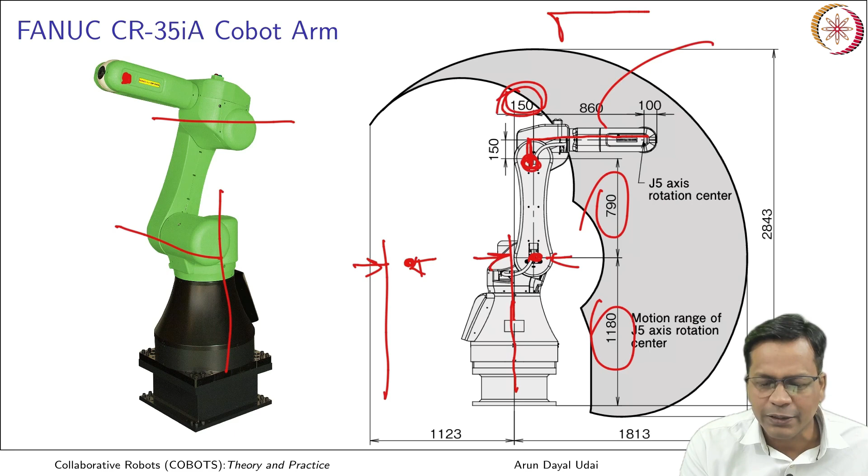It is the 3R stick model of the Fanuc arm, up till the wrist. The DH parameters based on the dimensions which are here: 1180, 790, 150, and finally the length up till here, that is from here to here.

So that makes it like this: 150, 790 and 860. So this is a regular 3R spatial arm.

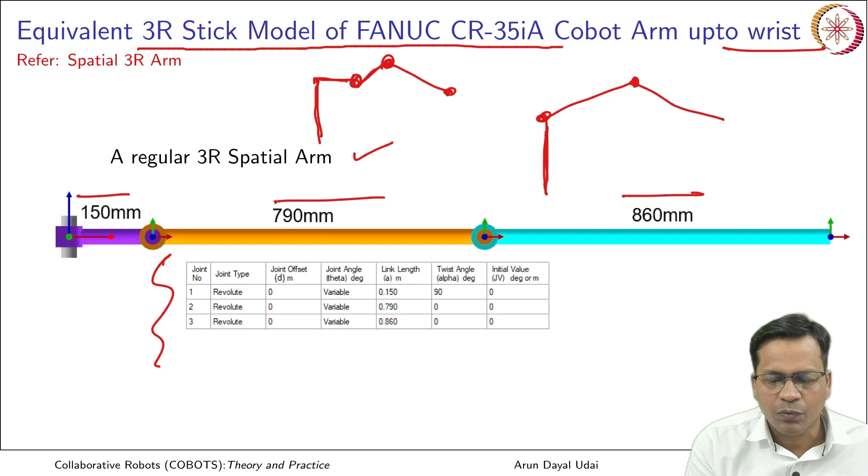In the earlier case you saw the first link was like this, the second was like this, and the third one was like this. But in this case the first link is shaped like this, the second one comes like this, and the third one goes like this. The first joint, the second joint, and the third joint are like this.

So there is a gap in between the first axis and the second axis. It was not the case for the standard 3R spatial arm. So I have to consider this distance also now, because this is a subset of the first three axes of the Fanuc CR-35iA arm. This is how I have split it into a 3R stick model.

Now I have to do inverse kinematics of this. Not just this link, now you can see this link, if I put it in this orientation, this link is something like this. Now I have to consider this 150 length also.

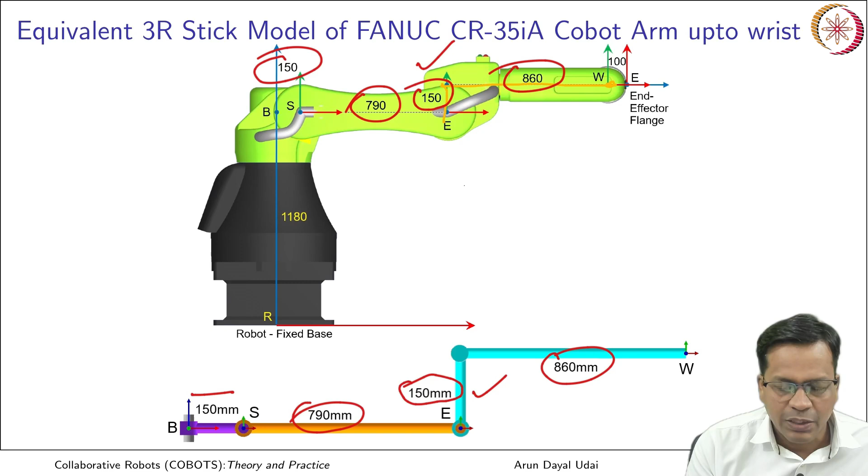So that has to come here. Now the modified stick diagram would be 150, that accounts for this distance, 790 for this distance, 150 again for this distance, and 860 for this distance. So overall my 3R stick model for this robot is like this.

This is very much near to the standard 3R spatial arm. So this point can go to any position in x, y, z location, and you have to solve for the axis angles: the first axis theta 1, the second axis theta 2, and the third axis theta 3, given x, y, z.

Okay, so this is the problem which I need to do inverse kinematics for.

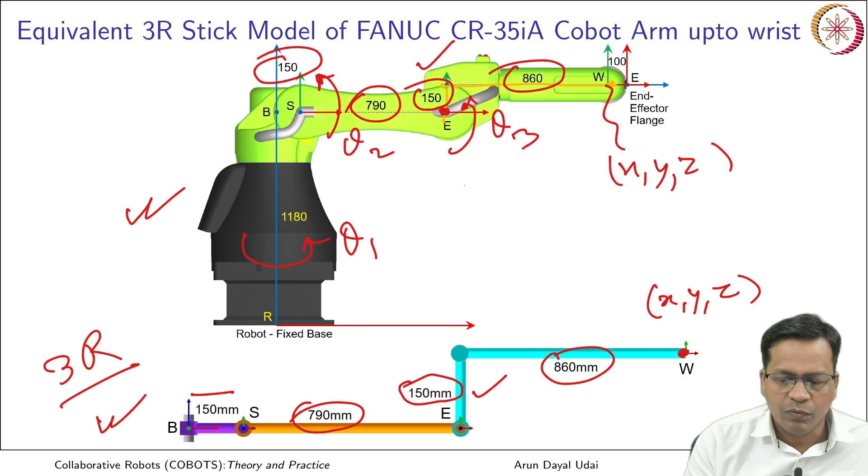Now let us convert this link, the third link, which is a bent link, to an equivalent 3R spatial arm kind of structure, so it becomes easier addressing the inverse kinematics problem. So instead of taking it like this, that is an elbow kind of structure, I will consider an equivalent link that starts from here and goes till here. This is a link replacement, so instead of using this, I will use this one.

So what is my equivalent link length then? It will be 150 square plus 860 square, and root of that. So that comes out to be 872.983 mm. So this is my new link that I have put.

Now when link 3 makes an angle of 0 degrees, that is theta 3 is 0 degree, in that case this at home position would be 9.894 degrees. This can be easily calculated using tan inverse of 150 by 860. So that angle is 9.894 degrees, which it has in its home position also. So this is the start angle of this link, and you have link length of 872.983 mm.

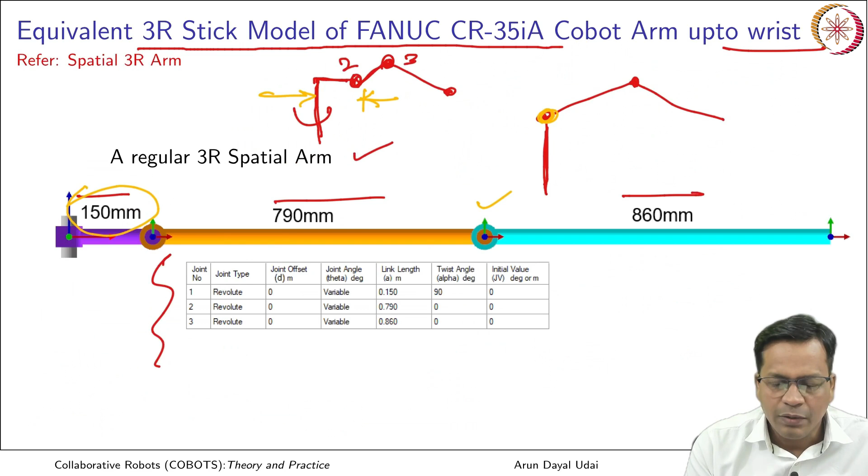Now I can do standard inverse kinematics of this arm in a way very much similar to this. So instead of 860, it is now 872. So this is my home position angle.

When Fanuc shows it as 0 degree, that angle would actually be tilted something like this, but the real Fanuc will show me this angle. So when it is horizontal to ground, it already makes some angle from the ground. So that I call it theta 3 alpha.

So that is the additional angle that accounts for the joint angle theta 3 plus this permanent angle, that is alpha, that is 9.894 degree. Now I will start solving for this.

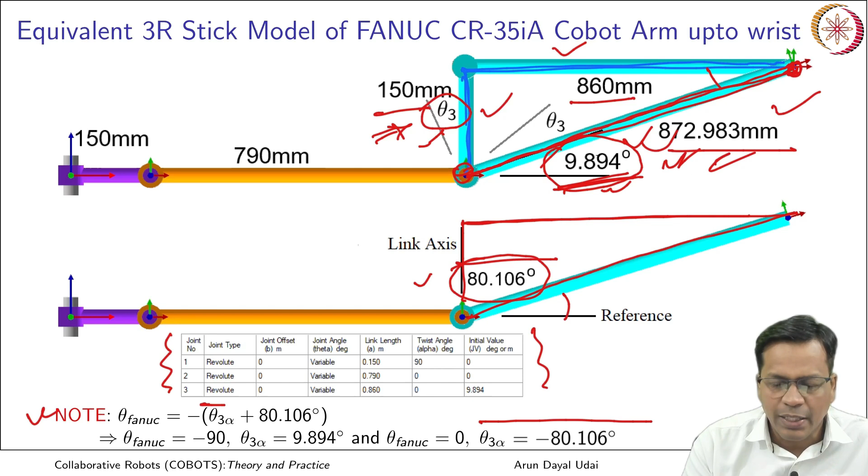For any given position x, y, z, this robot will configure like this. So here comes your theta 1, this is your theta 2, and you have theta 3. Actually theta 3 would include - this is your new link length, that is the equivalent link that you have put, and that makes a permanent angle apart from theta 3. It will have an angle alpha also, that makes it theta 3 alpha over here. So that is how I have put it, so as to make it very simple.

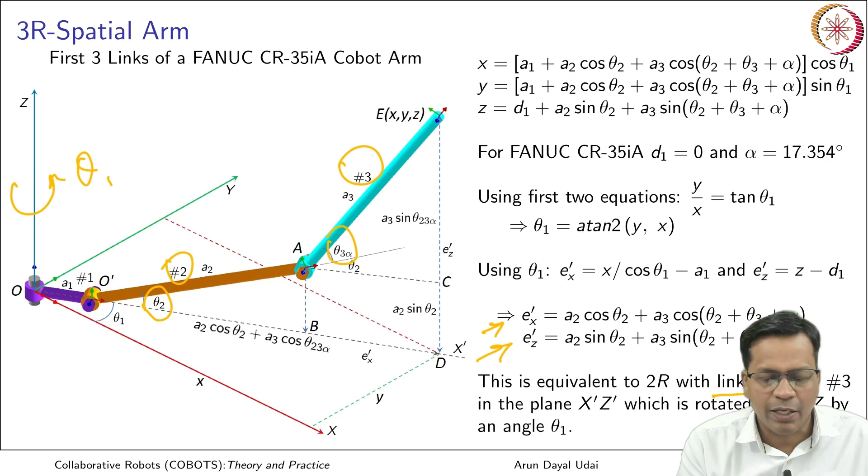This is equivalent to a 2R arm with links 2 and 3, in the plane x dash z dash, rotated about actual z by angle theta 1. Using this, if I know E x dash and E z dash, I can quickly obtain angle theta 2 and theta 3 alpha using our 2R solution.

That is your solution, but this theta 3 is not exactly theta 3. Theta 3 alpha can be used to get theta 3 like this: theta 3 is actually theta 3 alpha minus the alpha angle. So this theta 3 alpha included theta 3 and the alpha angle, so that alpha needs to be deducted to get the actual theta 3 shown by the robot controller. That is what can be obtained.

So the number of solutions here would be 4. This link is like this, got it? This is how it should look like. This is your first link, and you have elbow up and elbow down solutions. Again it will come as elbow up and elbow down. The one shown here is the elbow down solution. You can have an elbow up solution also.

The first angle theta 1, that is A tan 2 y comma x, gives you theta 1 and pi plus theta 1. So it should be all in the front or at the back and come back to touch the same point x, y and z. So this is how it is. The first angle would be 180 degrees behind, so if this is theta 1, the next one would be theta 1 plus pi. The arm will go back, and from back it will again come back to the same point.

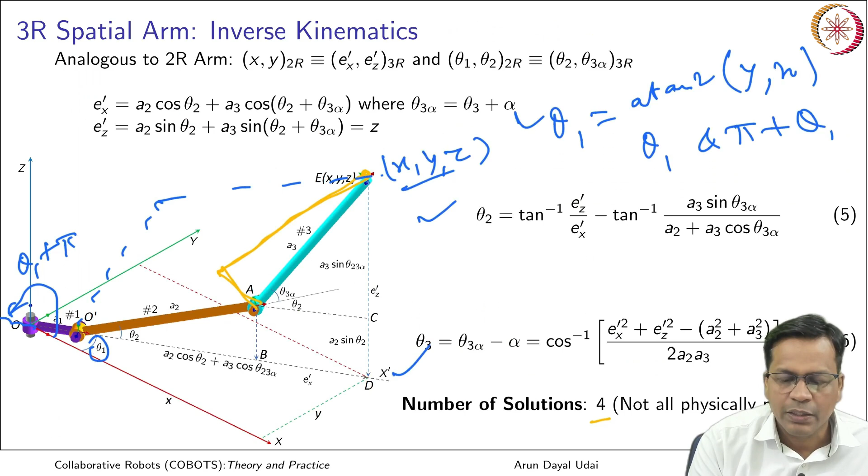It is not always possible for a robot to take up this mathematical solution; it may not be physically possible. So if I use the same solution obtained here for theta 1, 2 and 3, I can use my standard coding. I have used MATLAB here to do this. It will look like this.

You can see the stick diagram of the complete robot here that includes all the distances. This is your D1. From here to here is A1, this is A2, and I formed the equivalent link that looks like this. This is your alpha, and you may have some angle also. In this case theta 3 is equal to 0, so that angle comes here. This rotates like this, this rotates like this, and this rotates like this. This is theta 3, theta 2 and theta 1.

So if I put a sample value for the state of the robot as shown in this figure, this is the coordinate which I should be putting for the Fanuc robot, and this gives me theta 1 is equal to 0, theta 2 is equal to 90 degrees, theta 3 is equal to 0 degrees. You have to take care of solutions where the denominator is 0, which you can exclude. You can have an atan2 implementation here, as I have done over here.

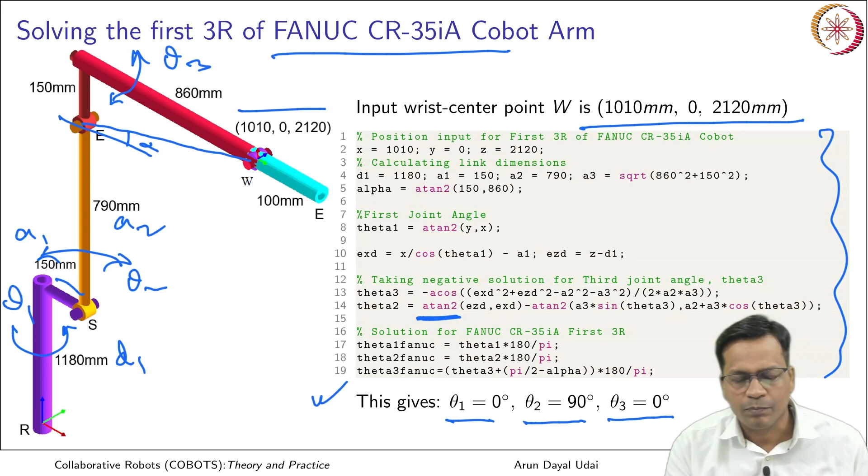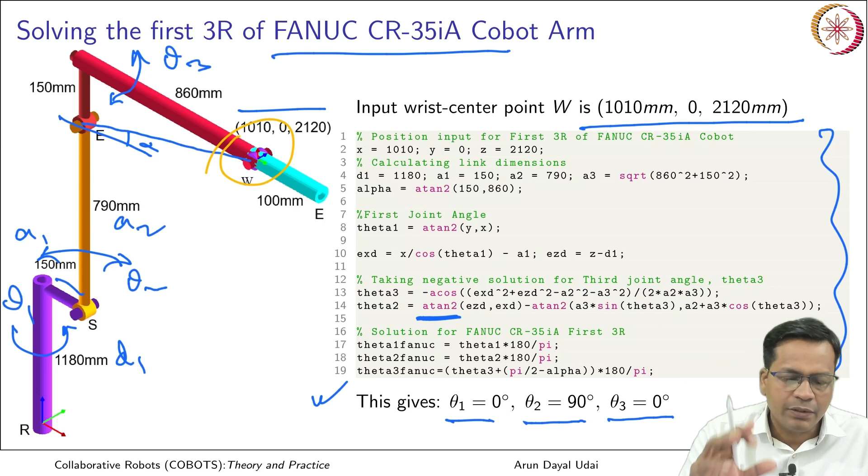This is how inverse kinematics right up till the wrist is solved, using the first 3 links of the robot, which helps position the robot to a particular pose. Then you need a further 3 degrees of freedom to orient it. So now, inverse kinematics using kinematic decoupling: up till here it is a 3 degree of freedom, 3R spatial arm.

This is the Nachi robot CZ10 cobot. Till here it is 3R. The architecture of this robot is also similar to the one used by Fanuc, only the dimensions are different. So till here it is this. After that it is another 3 degrees of freedom, so that goes like this.

If you take this up from here, this is your axis that comes like yaw. And then you have the pitch axis that is here. And then you have one more axis like this, so that finally comes out like this: this is roll, this is pitch, this is yaw.

So you have all 3 axes intersecting over here, and that is known as a spherical wrist. It behaves like a spherical joint which can attain all 3 rotary motions.

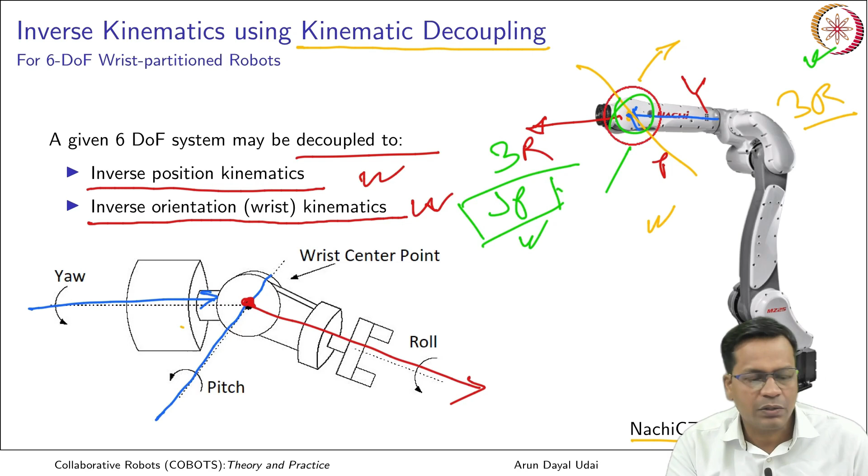A given 6 degrees of freedom robot can be decoupled using inverse position kinematics and inverse orientation kinematics. There are 2 problems: if you know the wrist center point, you can do inverse position analysis the way we did in the last example, and for the remaining 3, if you know the orientation, you can solve for them. For orientation we use this approach, for positioning we use this one. This is known as wrist partitioning based approach to solve inverse kinematics.

So now let us continue. This is another robot, Staubli TX2 Touch 90 robot. This also has a similar configuration with the wrist center point somewhere over here.

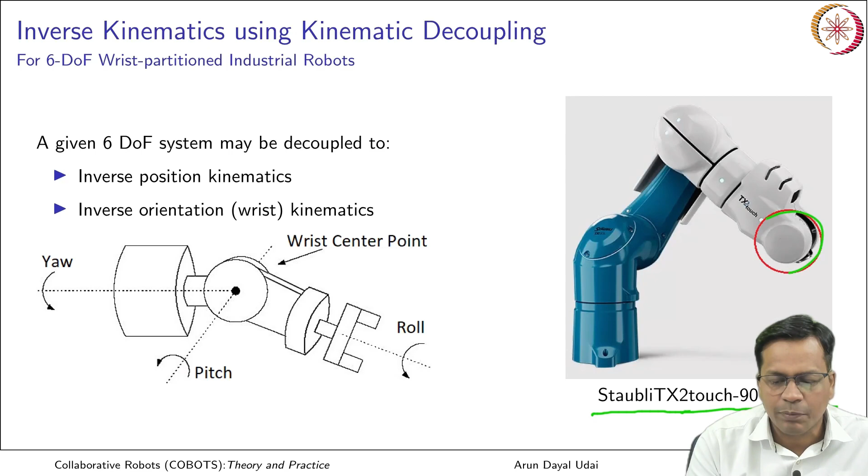Now, steps to do inverse kinematics for wrist partitioning based approach using trigonometric and vector approach only. So what is my input? Input is the end effector position that is given by, if this is the 6 degrees of freedom robot, this is joint 1, joint 2, joint 3, 4, 5 and 6. Finally you reach till here.

So this position is known, the position of end effector that lies here is known. So this position vector is known, which I have written as O6 with respect to the base frame, that is O, that is 0.

So end effector position is known, and for orientation, if you know the roll pitch yaw angle of the end effector, that is RPY known, you can quickly convert it to the rotation matrix. If you remember your Euler angle conversion, roll pitch yaw angle can be converted to rotation matrix using this.

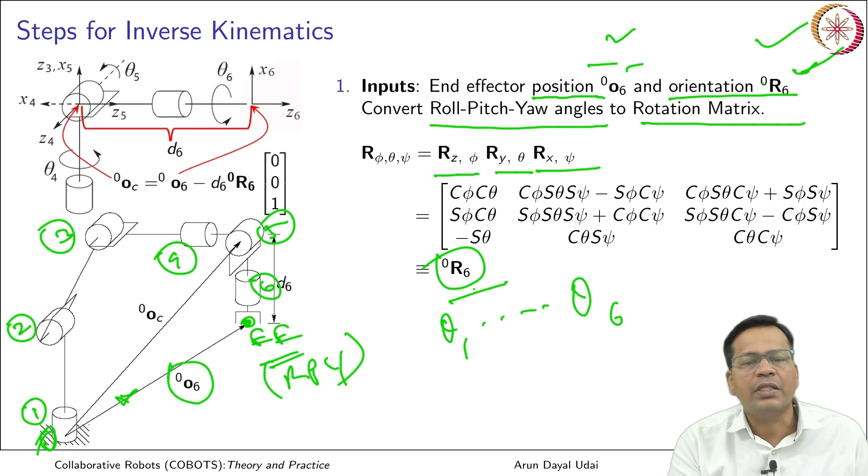So, rotation about x, y and z. If you know roll pitch yaw, that can be used to convert it to the rotation matrix of the end effector, and this is with respect to the 0 frame again. So these two things are known, the 0R6 is known, 0O6 is known, position and orientation. So what I need to find out is all the joint angles theta 1 to theta 6, because this is a 6 degrees of freedom robot.

So the next step is, using the known values, solve for the first three joint variables theta 1, theta 2 and theta 3 such that the wrist center 0OC has the coordinate which is given by this.

So the last length is known. This offset can be extracted, d6, from the technical specification. If you created the DH parameter table, this is coming under d6, that is joint offset, distance travelled along the z axis. So it was this 6, this is your z5, is it not? So this is your 5, 5, 6 and 4 all are intersecting at a point.

So use the inverse kinematics solution for a 3R spatial arm. Now, if I know the location of this point, the wrist center point, the remaining arm is a 3R spatial arm and I can quickly find out.

So 0OC is known using this. If this position is known, this is known using this, d6 is known, but d6 is known, this vector is known in its own frame, that is about this frame. So it can be written as d6, 0 0 1, or 0 0 d6, because this is the distance along z. That is with respect to this wrist.

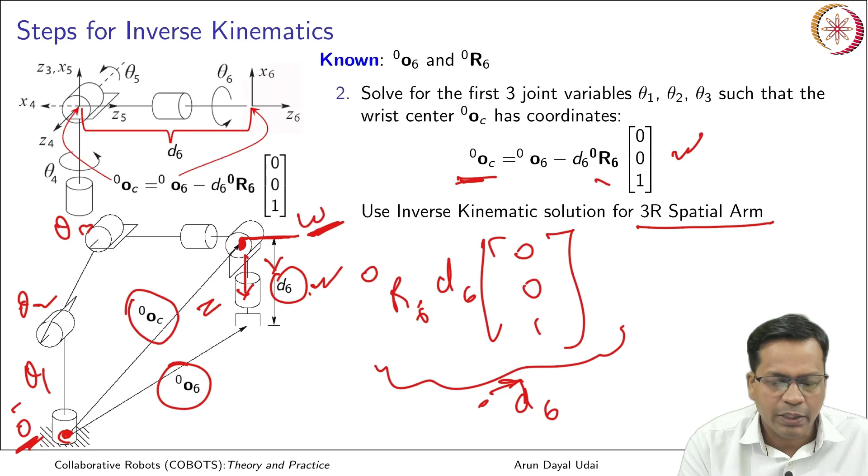Using the joint angles obtained in step 2, I will compute 0R3. Now that I know theta 1, theta 2 and theta 3, I have the DH parameters already - D1, A2 and A3. So I know the dimensions, I can quickly compute 0R3, the rotation part of transformation matrix 0 to 3.

So you have 0R3 coming here as a 3 cross 3 matrix, and then you have position of wrist center point over here. So this is where you can obtain 0R3 - you just do forward kinematics right till the wrist center point and you can quickly obtain this.

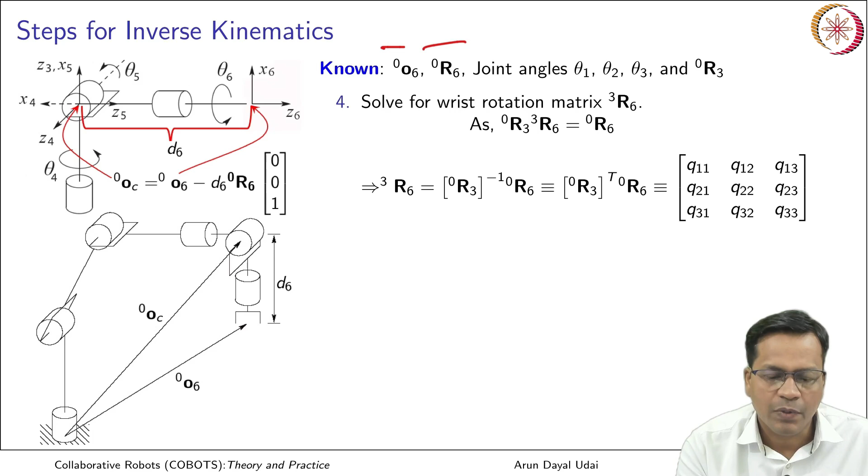Now I will use it. So now I have the following things in hand: these two are from the given problem, the joint angles theta 1 to 3 obtained earlier, and 0R3 from the previous step. So you already know 0R6 is the product of 0R3 and 3R6, that is rotation transformation from here to here and from here to here.

So now I can use this again, I will take the inverse. I can bring it to this side and calculate 3R6, from frame 3 to frame 6. I can quickly obtain it like this by taking the inverse. This gives me a set of values as a 3 cross 3 matrix from 3 to 6 frame. I got the values here directly.

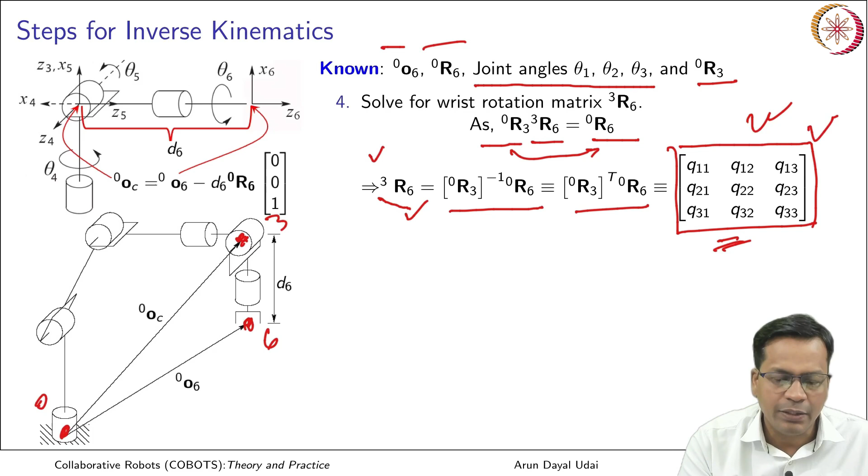Now what I will do is use this again in the next step. So now you have in hand 0O6 and 0R6, joint angles theta 1, theta 2 and theta 3. If you have theta 4, theta 5 and theta 6 already, those are in terms of variables.

So using the Euler angle system again, Z, V and W. Z is along this, this is called V and this is called W. I have used all three rotations now, theta 4, theta 5 and theta 6. If you use this, I can quickly get 3R6 as this matrix, directly from the Euler angle approach covered earlier in one of the lectures.

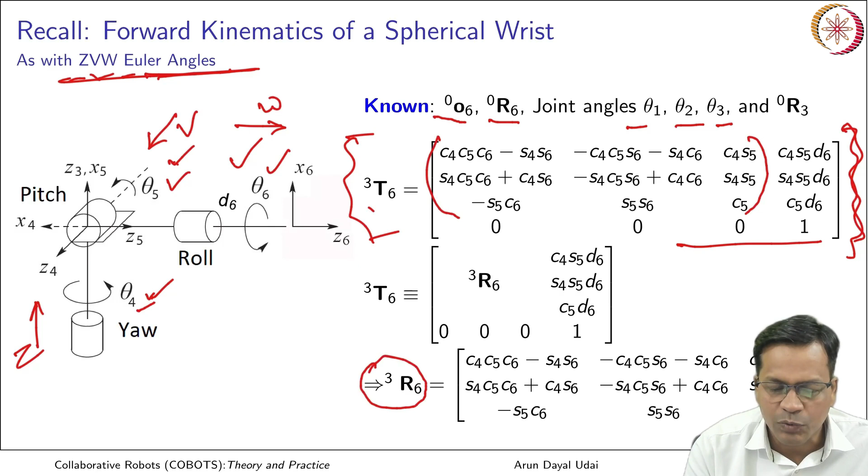So I can use this - it's in terms of variables, but the values are already obtained here. This is 3R6 with these values. Now both should be equated - this 3 cross 3 rotation can be equated to the one obtained in the previous slide.

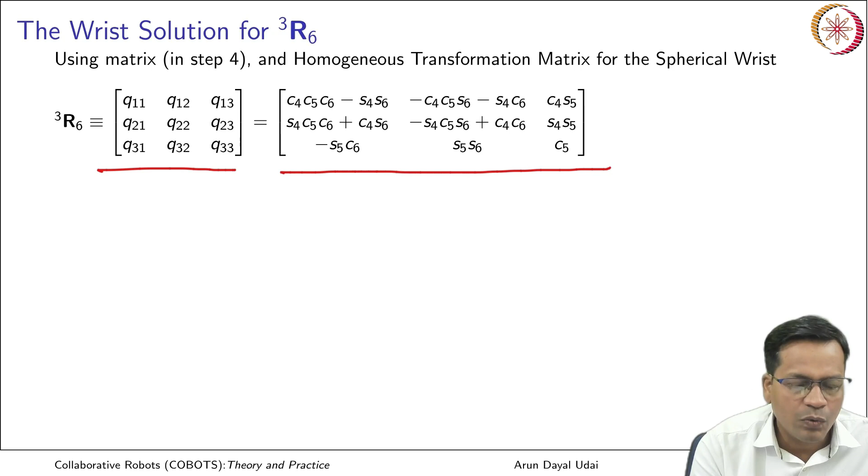So if I equate them here, these are the values, these are in terms of variables. Now one to one we can equate, and using that the joint angle theta 4 can be obtained from Q23 and Q13. Using these two, you can quickly divide and find out theta 4 - this divided by this gives theta 4.

Similarly you can obtain theta 5 using Q13, Q23 and Q33 - the last column can be used to find this. From the first two you have obtained theta 4, using the whole of this you can find theta 5. Similarly theta 6 can be obtained from these two - you just divide and get it.

So all these are expressed in terms of arc tangent solutions, the atan2 solution. So theta 4, 5 and 6 can be obtained - this is the alternate solution which is 180 degrees apart. With this you can quickly obtain all the angles: theta 1, 2, 3 using the 3R spatial solution, and using the wrist solution I could find theta 4, 5 and 6.

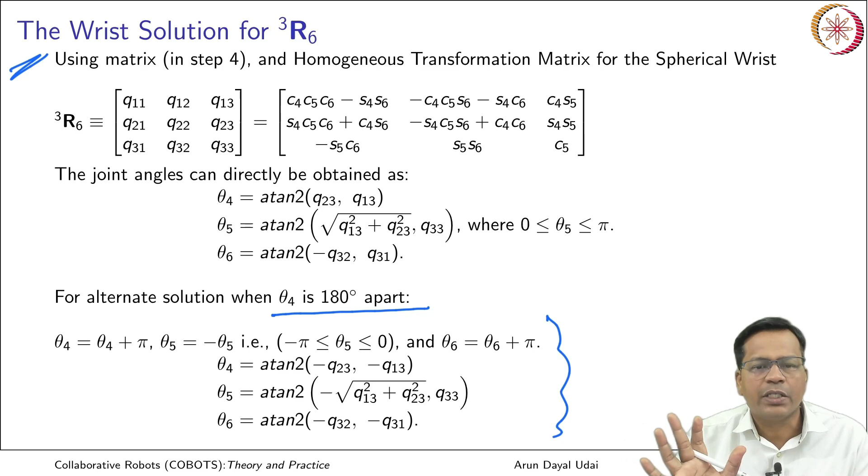So this is how any robot of this kind can be split into a positioning problem and an orientation problem, and it can be solved like this. That is all for this lecture.